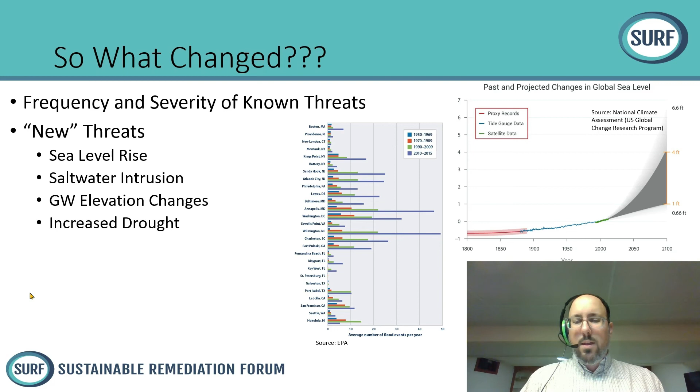So there's some, quote, new threats, and they may not be new, but maybe they're more predominant than they ever have been. So that's kind of causing us to change how we're thinking a little bit to address this. And two obvious examples are Harvey and Sandy. Both of these events had significant impacts on environmental sites.

You can see on the pictures there, the top left corner down in Texas was a site. The first picture is in the heart of the flooding when it was worst, and then on the right, it's about a week later. We still see a fair amount of flooding. So that was an EPA Superfund site that had to go back and reinvestigate and find out what's been released.

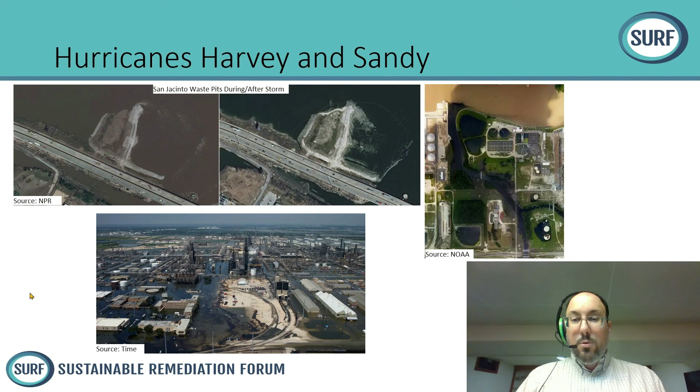The picture on the right and the picture at the bottom are both from some refinery areas down in Texas that had some impacts, where you can see the black, presumed to be oil or some type of petroleum that's gotten into the waterways. So the shift is definitely on. We're looking at a more proactive approach. We're looking at vulnerability assessments now and how we mitigate those risks that we identify.

And this is happening on both new and existing sites. We're not just looking at the new sites as we do design work and working that into our designs. We're also going back and looking at existing sites. How can we retrofit those sites to make them less vulnerable to the risks that we may see over the next period of time?

What it was is a vulnerability assessment or screening of about 6,000 sites in the state of Massachusetts. Through that, we identified about 1,700 of them that have some level of vulnerability, whether moderate or high. It was a risk screening model, which I'll show you in the next slide, and it did use a bunch of data sets from FEMA, GIS, NOAA, etc. There was a report that came out, and that report is also available on that link below, as well as through our website.

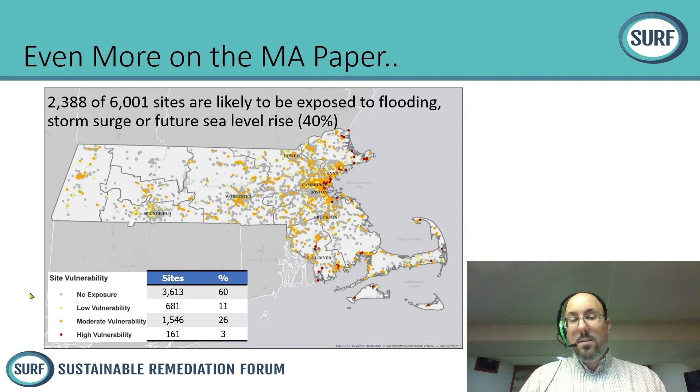And 40% of those sites, as it says on top there, were subject or likely to be exposed to flooding or future sea level rise. So a lot of sites, a lot of things to consider for the state up there. So what else are we doing?

A big contributor to the ITRC SRR team, Sustainable and Resilient Remediation team. We have a lot of folks from SURF that are operating in that. They're putting out a document. It's due out the end of the year. It's going to provide resources to a bunch of folks to kind of help them figure out how they can integrate these type of practices into their projects. It's updating a 2011 guidance that was put out by ITRC.

And the big factor on this, or big extra to this, will be incorporating climate change resiliency, notably wildfires, sea level rise, etc., that were not really in the 2011 guidance. We weren't really up to speed back then. So that's a big part of this and the big driver for the update.

And then there's a lot of recommendations in there to not only look at the environmental footprint and costs and benefits, but as I said, incorporating the social and economic side of things. So it's a balancing act, and that's what this guidance document is really trying to do. So this is kind of a draft idea of what we talked about in the team. I don't know the final product yet, so definitely consider this draft.

But the idea is having something like this with clickable boxes that would take you to links or take you to guidance or take you to BMPs or something along those lines based on the different topic, whether you're looking at what do I do in a certain spot in the life cycle of the project. What do I do if I want to develop a site model? I'm in the RI stage or I'm in the remedial design stage. What should I be considering then?

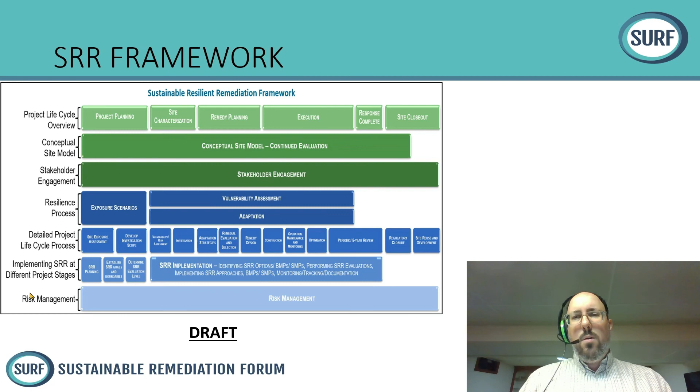I'm looking at risk management, so it's broken down by topics, life cycle, and will hopefully be a roadmap for you to figure out where you can get information based on what you're looking at. And then another idea is something along these lines where it's going to be like a best management practice checklist where you identify your factor you're looking at, and that'll tell you what checklist or what things to consider. So changes in precipitation.

If you're going to see more rain, you're going to expect more flooding and bank erosion and maybe snow or hail, depending on where you're at. So that's where you would want to go and look at those different best management practices, figure out how you can mitigate that through your site. On the opposite, less precipitation is going to bring you drought, etc.

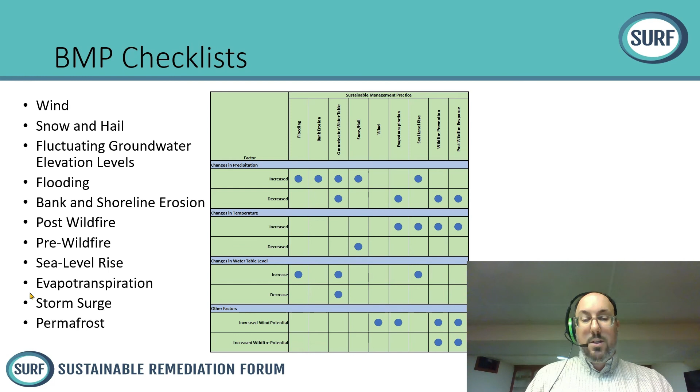So you can see there's a couple things there with temperature, precipitation, change in water levels, which we talked about earlier, the groundwater, and then some other factors too. Are you going to get more wind, which could have impacts on some of your sites, or wildfires? So the idea is make this simple, make it clickable, easy to find, easy to understand, and really help folks to implement these. Not only folks that do it every day, but maybe people that aren't as aware, as a part of an education too.

So future plans, what's needed? I think one of the biggest things we need is to develop a more robust vulnerability assessment guidance. I don't think one really exists from a site remediation standpoint. I know there's a lot of tools on how we mitigate, but how do we score these sites? How do we evaluate these sites? Kind of taking what they did for that Massachusetts study and make it more on a site-by-site basis.

And then take that Massachusetts study and expand it to other states. There's a lot of coastal states that could really use this document, or the screening, if it's not already been done. Take the lessons we learned from that one and apply it to other states to do a similar type of study.

Get the ITRC document finalized, hopefully again by the end of the year, and get that distributed and folks looking at that. Integrating into our planning is a big key, right? It's how do we get this in the project planning no matter where we are, what phase we are.

How can we start to look at this, whether we're in the initial planning or whether we're in the back end where we're design, or even after we've already implemented? As soon as we can get that in, the better, but there's always an avenue to do so.

Getting stakeholders involved is always critical for any project, but even more so for this because of the idea that maybe a lot of people aren't thinking this way. They aren't thinking future necessarily. It's hard for folks to maybe see these things without it happening,

but now as it happens more and more, I think awareness is getting out, and that's the last thing, is really increasing that awareness, making folks outside of our little bubble understand this and start to support it, and it's not just a secondary thing, but it becomes a primary consideration, with the goal of obviously trying to minimize the impacts from all these different events that are happening over time.

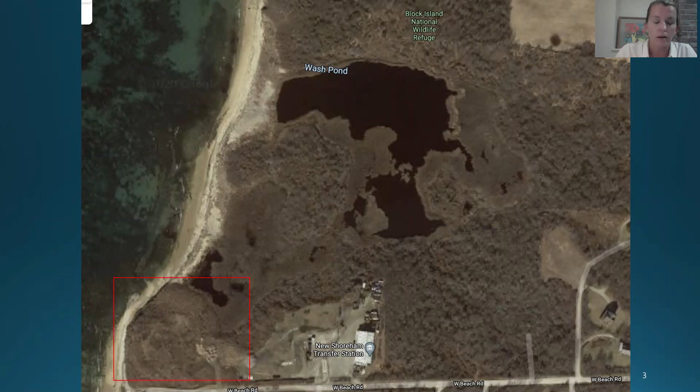So the site location is on Block Island, which is off the south coast of Rhode Island on Block Island Sound. The site itself is on the northwestern shore of the island, adjacent to the Block Island National Wildlife Refuge. Here's a closer view from an aerial photo where you can see in the bottom left, the area in the square is the buried landfill, and the site is still an active transfer station. It's a total of about 10 acres on 3 different parcels. And you can see also in this photo the adjacent freshwater pond and freshwater wetland complex.

The landfill itself was in operation from about the 1900s to January of 1990 as basically an open dump for household waste, demolition debris, etc. It was listed on the DEM CERCLA list as SFA, which meant that it was on the EPA Superfund CERCLA list with a status of active. And I've just included the site number and project date for that reference.

The site is adjacent to several sensitive environments, which are listed here. One already mentioned is the National Wildlife Refuge to the north. There's some federally endangered species habitat, some state listed species habitat. It's adjacent to state designated type 1 waters, which are conservation areas that are designated by CRMC. And the site is also part of the federal coastal barrier resources system. And again, it is right next to that freshwater wetland complex.

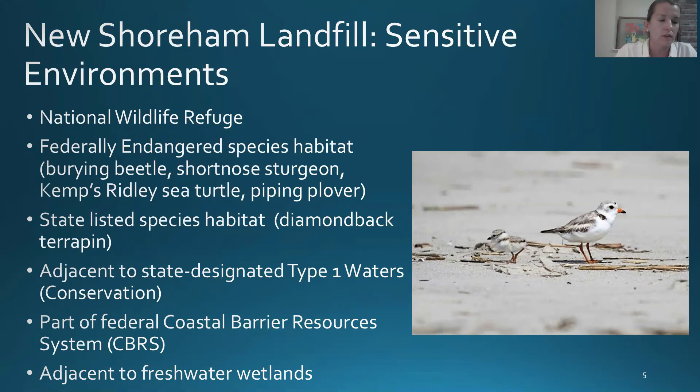Block Island itself has been named one of the Western Hemisphere's last great places by the Nature Conservancy, which manages over 2,000 acres on the island for conservation. So again, the site, the area of landfill in question, and you can see that within the context of the natural areas surrounding it.

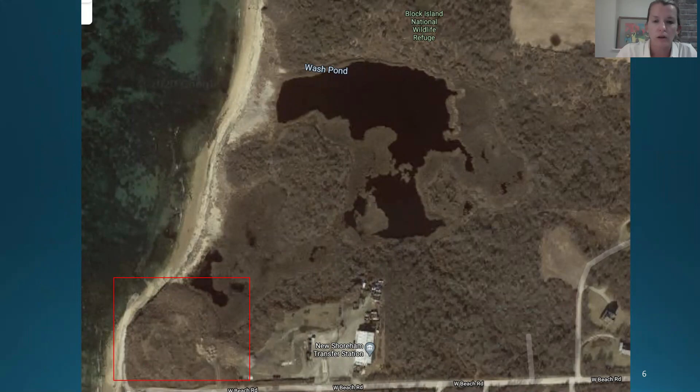So in 2015, there was a CERCLA site assessment that was performed on the site. Just some interesting results from that assessment of note. A few of the soil samples exceeded state residential exposure criteria for metals and PAHs. There were some test well samples that exceeded residential limits for some metals. And then mainly what was observed was the solid waste debris on the western shore of the landfill where the shoreline was eroding. So things like auto parts, ceramic and clay, plastic and metal. It was also noted in the assessment that there is no percolation containment present, which means that contaminants are exposed to ground and surface water pathways.

That assessment was done after 2012 when Superstorm Sandy hit Rhode Island, and the storm definitely exacerbated the erosion that was occurring on the western shore of the landfill, and you can see evidence of that here in this photo that's provided by Janet Freedman, our coastal geologist. So you see some of the erosion that's occurring, some of the solid waste materials that are beginning to spill out on the beachfront. More of that here.

So several different types of materials. So for that reason, the town of New Shoreham applied to CRMC and other agencies to remediate the eroded slope in 2016. They submitted to us an alternatives analysis performed by a consultant that looked at several options.

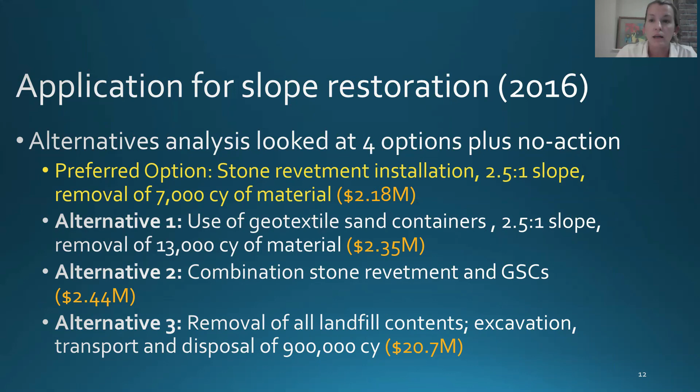The consultant also looked at the no action alternative, which was dismissed because addressing this landfill issue was an action item within the town's hazard mitigation plan. So the town had already recognized the need to act to remediate the situation. So the no action alternative was rejected.

In terms of permitting, the town was required to go to the Department of Environmental Management for a limited action remedial approval letter. They came to CRMC for a coastal assent, which included the need for a special exception, which meant that they needed an exception to a prohibition in our program, which was basically creating a structural shoreline adjacent to type 1 waters. To get a special exception in our program, you need to meet several criteria, one of which is that the project serves a compelling public purpose, which it was determined that this project did.

They also needed to consult with the U.S. Fish and Wildlife Service regarding the Coastal Barrier Resources Act. They needed an exception to that act, which was granted. When those permits were issued, there were several stipulations that went along with them. In terms of the DEM permit, the town was required to submit a remedial action work plan to bring the entire site into compliance, and they were required to submit a draft environmental land usage restriction for the site.

For CRMC, they were required to commit to monitoring of the revetment ends for erosion impacts. They were required to provide for public access by installing a public access pathway. It included requirements for soil stabilization measures during construction. And the town was also required to submit a long-range landfill remediation plan.

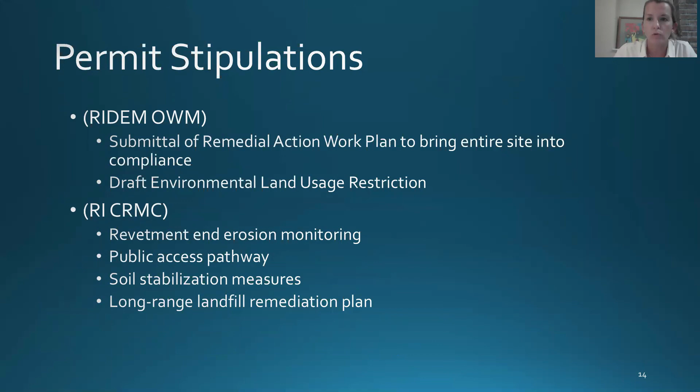And while the preference of both agencies was to see the entire landfill contents removed and relocated and reinterred, that was well beyond, as detailed before, the financial resources of the town. And so a compromise was reached that the town would implement a long-range plan to maintain the slope and remove material from the landfill over time.

What helped in the development of those provisions was the fact that the CRMC has very detailed information about erosion rates along the Rhode Island shoreline, including Block Island. These maps have been created by Dr. Bryan Oakley at Eastern Connecticut State University, and they're very helpful in that they have perpendicular transects which show the average annual erosion rates for areas of the shoreline.

And so these are the transects adjacent to the site in question, which show an average annual erosion rate of about 1.6 feet per year up to 3.2 feet per year. And so our permit staff were able to consider this when making recommendations about what needed to happen over time as far as material removal.

And so basically they determined that over a 15-year period, the site was likely to see erosion of up to 45 feet, so a loss of 45 feet of shoreline. And so the town would need to prepare for that and be willing to remove any material exposed over that time frame.

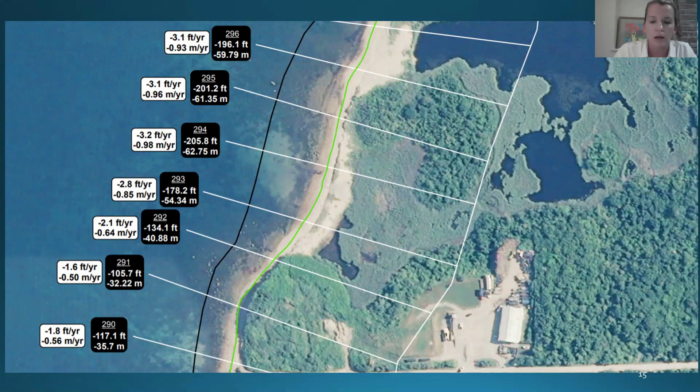Another helpful tool was our storm tools maps, which are high-resolution maps of storm surge and sea level rise modeling that have been done for the entire shoreline of Rhode Island. And so those helped in checking the calculations for the design elevations, looking at what the significant wave heights were likely to be at this site.

Interestingly, the significant wave height detailed by storm tools is a bit higher than what is noted on the FEMA V-zone maps. And so that information was very important, and it was determined that the engineer had adequately accounted for the significant wave height. And really the design was to withstand a 100-year storm.

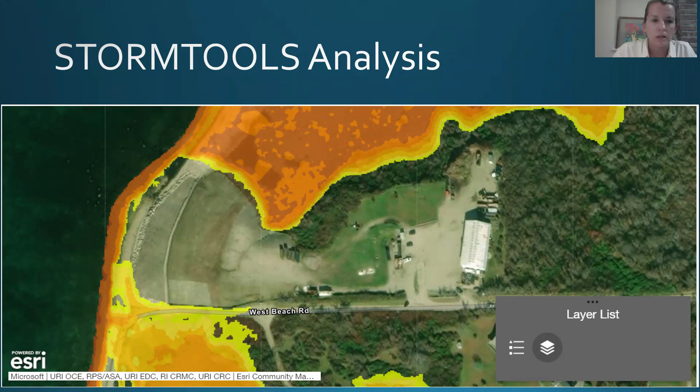When it came time for construction, unfortunately the town lost some federal funding in the form of a community development block grant that they had been counting on, so the project unfortunately needed to be scaled back. Originally, the revetment design was supposed to be 20 feet in elevation. It wound up being reduced to 8 feet with 3 to 10 ton stones.

The resulting slope was originally supposed to be a 2.5 to 1 slope. The design was changed to a 3 to 1 slope, which was to be covered with sand and loam and planted with beach grass. According to the town's engineer, the estimated lifespan of the structure is about 15 to 20 years, which is why that was the time frame for the incremental maintenance plan and removal plan.

The town secured a $2 million municipal bond to fund the project, and in total, about 120 tons of scrap metal and trash were removed to pull the toe of the slope landward approximately 50 feet.

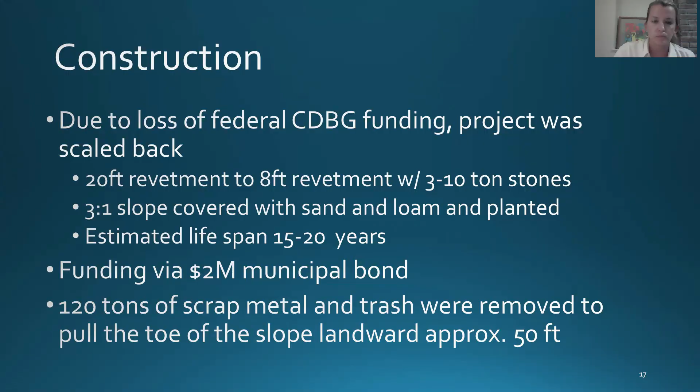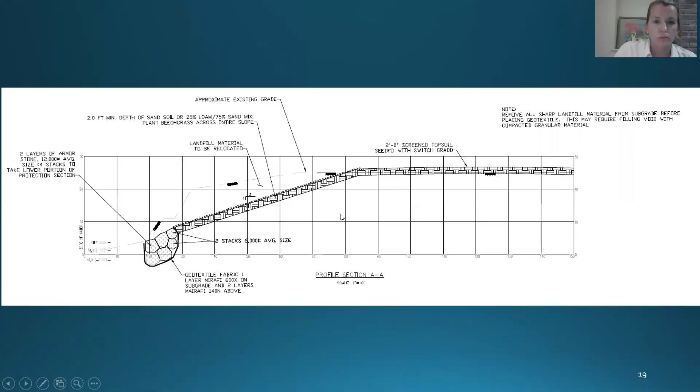Just a couple things I wanted to note at the end of this presentation were that having those detailed erosion rate maps and the high resolution sea level rise and storm surge modeling were very helpful to CRMC permit review. It helped our permit staff to make recommendations that made sense.

Lateral shoreline public access is always an important consideration for CRMC when permitting shoreline structures because of sea level rise impacts. So where it's safe to do so, we want to make sure that there are provisions for preserving public access, which was done here.

Future considerations may certainly need to include impacts to groundwater. As sea levels rise and the water table rises in this area, there may be additional impacts to groundwater quality from sea level rise and saltwater intrusion.

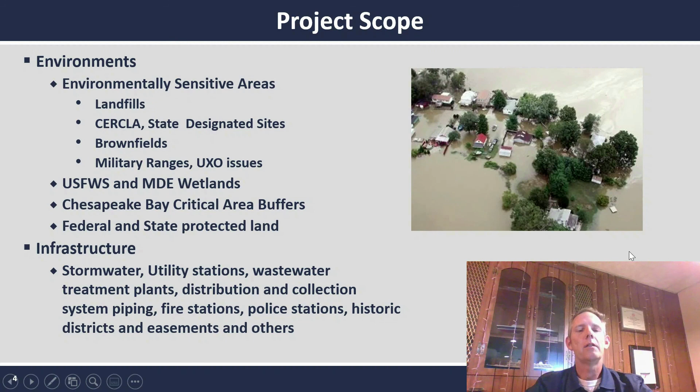And you can see the rest of the encompassing items that the scope addressed, including other environmental areas as well as infrastructure impacts created by the particular project for coastal resilience.

So the next item for the project was to identify climate impacts. And this would be similar to any climate resilience project in that you have to identify the potential impacts. And for us, we were looking mostly at coastal impacts. And you can see the main three components here. So it's not only sea level rise, but potential impacts from precipitation as well as associated storm surge with large events.

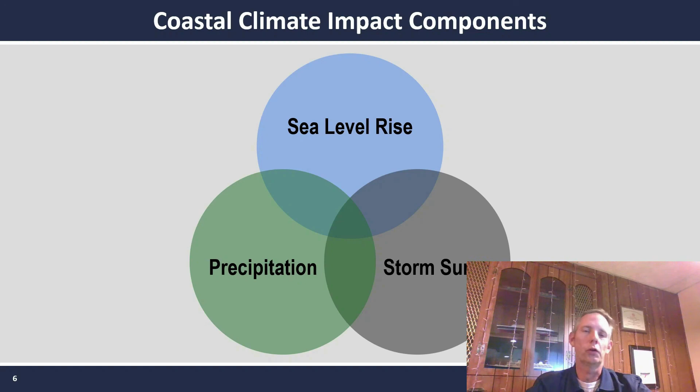So the first item to realize in a project like this is that there are many different data sets. So for our particular site in Northern Maryland, there were several items that we looked at. And basically, you can see here, sea level rise projections from 2018 were directed at a worst case scenario of about 7 feet for the high range. We also had storm surge indicated and precipitation for the area.

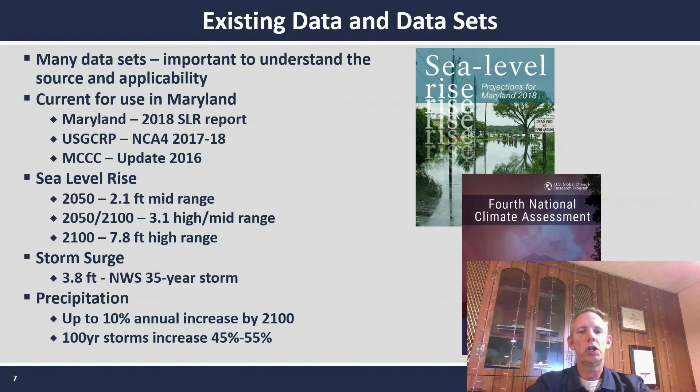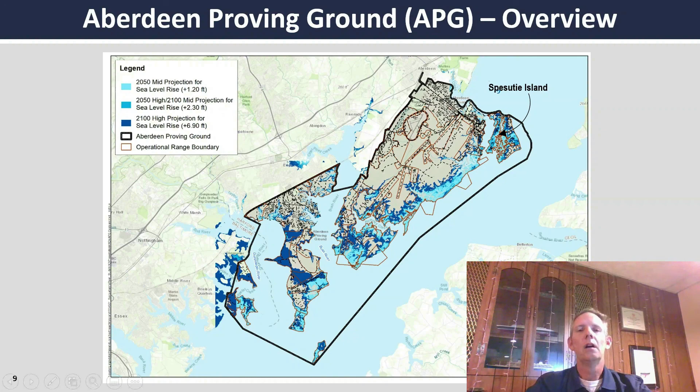So once that is identified, the next step is to identify climate vulnerabilities. And for this project, we looked basically at a GIS-based model tied into those sea level rise components. So you can see here, this is a map of Aberdeen Proving Grounds, which is one of the lowest lying areas in Chesapeake Bay. So we could expect significant impacts to the end of the century.

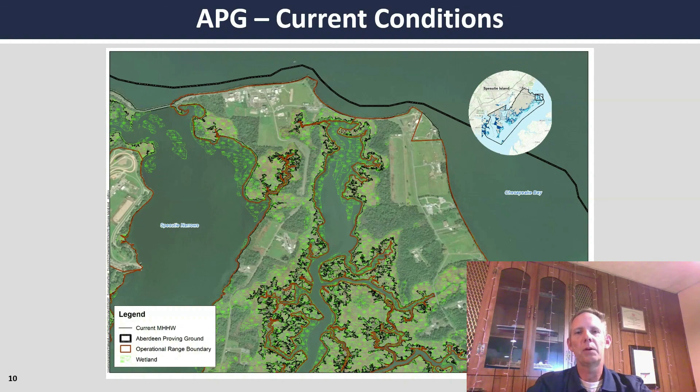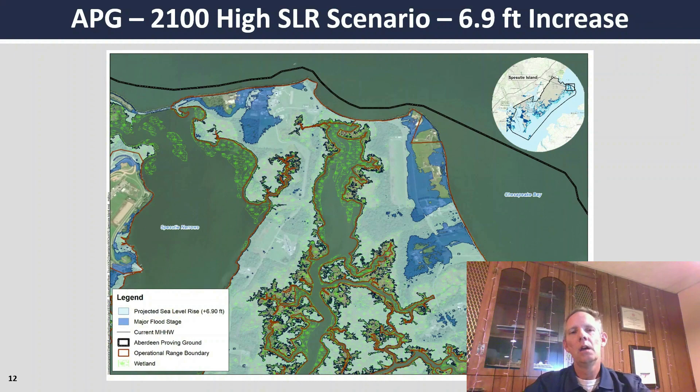You can see here just an example of some of the visualizations of our project, current conditions at Aberdeen Proving Grounds. And then as we move through the century, you can see this is 2100 mid scenario, shows a 2.3 foot increase, but also if you add the major flood stage to that, it inundates further areas. And then worst case scenario, as you get closer to 2100, you can see significant flooding components on this portion of Aberdeen Proving Grounds.

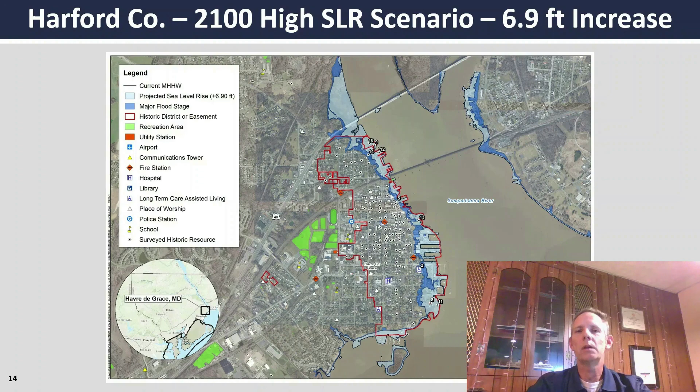So once you've identified the climate vulnerabilities and they're specifically identified, you move to the strategies and measure options that could be brought to bear to protect coastal areas. So when it comes to that, you're talking about a framework of three different ways to proceed. Accommodate would be to alter existing structures to be able to withstand those climate impacts, in this case, sea level rise. Protect would be using heavy or hard engineering solutions to protect areas, including areas with environmental contamination. And third, managed retreat, relocation of structures from those particular zones.

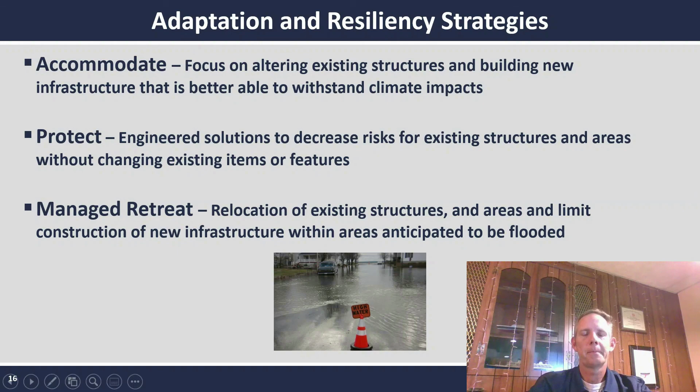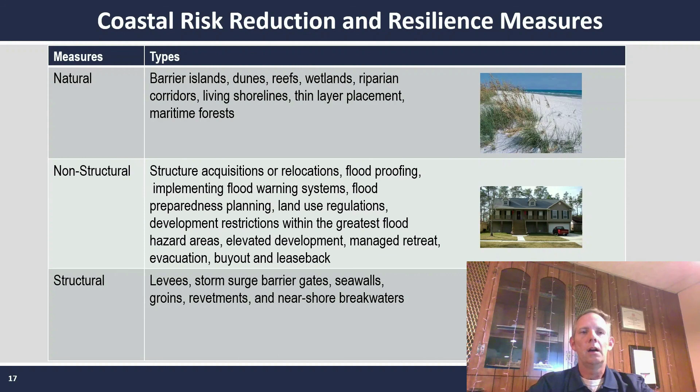Now that becomes problematic if you're talking about managed retreat in the context of contaminated sites, because obviously you would have to remediate those sites or they would still be impacted in those future conditions. So within our report, we identified the potential solutions for these various impacts, and they were defined, as you can see here, in three different ways to provide that resilience: natural, non-structural, and then structural.

Just to touch on what some of these are in more detail, natural or nature-based measures to protect these areas include reestablishing or increasing dunes or beaches in an area. Vegetated features also provide extra protection, such as wave attenuation. So you're talking about increase of coastal marshes, submerged aquatic vegetation.

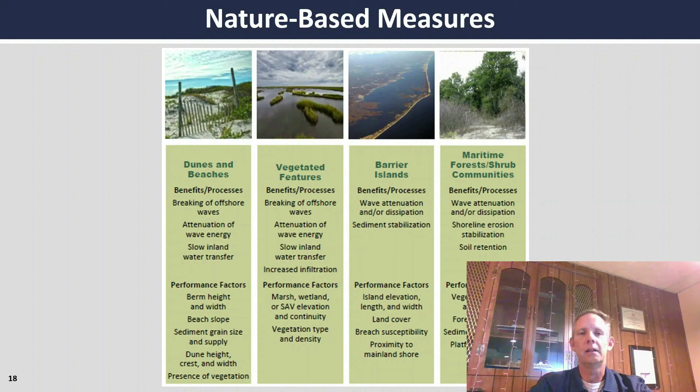We also looked at potential restoration of barrier islands that can also obviously dissipate wave energy. And then another key item, maritime forest and shrub communities also provide some of that extra resilience. So this is one of the first things that we looked at for potential solutions in these areas of impact in northern Chesapeake Bay, the nature-based measures.

Next, there are obviously non-structural measures you can proceed with, such as changing floodplain policy and management. This can have significant benefits later on in the century if you start implementing them now, so that people start moving out of those danger areas.

In the case of contaminated sites, that would also be the case. It gives you more time in planning to remove the constituents of concern from those areas. Floodproofing and impact reduction is also a solution, and obviously relocation is possible in certain situations.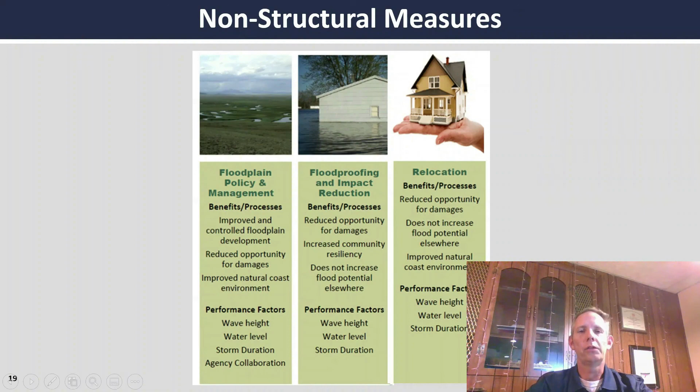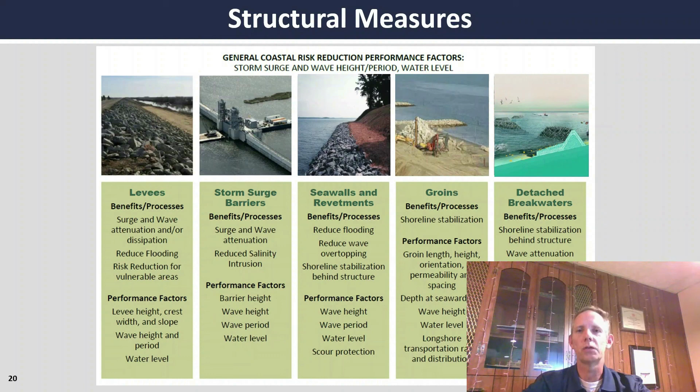Then finally, structural measures. These are items that folks would probably defer to when you think about solutions to coastal flooding. So hard structures like levees, even storm surge barriers, seawalls, and revetments that can provide that shore armoring in situations where a specific area has to be protected. These are sort of a last resort in particular areas.

So once you have possible measures identified, the next is to use those possible measures and adapt them to a specific plan for an area. And some of the keys there, as we talked about before, obviously timing to these coastal impacts is going to be based on how quickly sea level rise occurs. And it's also based on criticality of areas, such as if you have unexploded ordnance in an area, how critical is it to move forward with that quickly.

So again, timelines on when to execute these measures are based on criticality, your specific identified strategies and measures, and then looking at adaptive design considerations, such as seawalls can be designed to be added on later. So make sure that your base design for a seawall that you might construct to 1 foot by 2050 could be raised to 3 feet, say, by 2100. And also, it's key to understand the study horizon. What is your target date for completion?

Another important consideration is that there are many grants available for this type of work. An example was for this project, we had a follow-on project with the city of Aberdeen, which is adjacent to the base, to complete a full assessment of climate adaptation. And we actually looked at using dredged material to provide that coastal resilience and protect that town and some of the environmentally sensitive areas there.

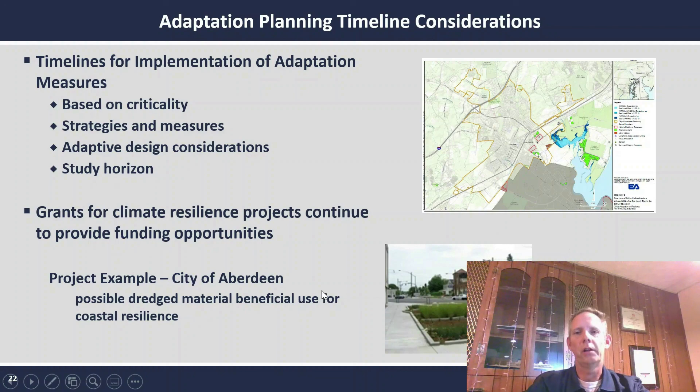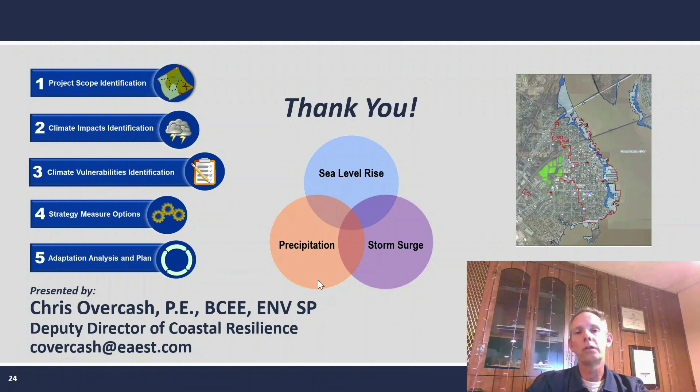This is part of the larger U.S. Fish and Wildlife Service Rhode Island National Wildlife Refuge Complex and supports important wildlife such as New England cottontail, harlequin duck, saltmarsh sparrow, and over 200 other seasonal bird species. Important habitat types it supports are shrubland, cobble beach, and saltmarsh. In summary, this is a popular destination for tourists, it provides unique habitat, and is important for various species. Today we will be talking about the Remediated Landfill, which is located here adjacent to Second Beach.

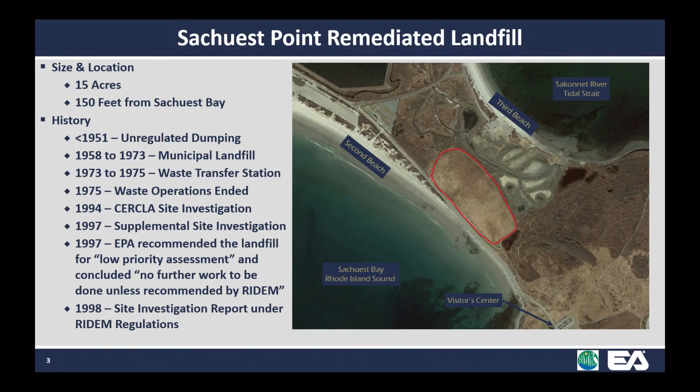Accordingly, a site investigation report was prepared under RIDEM regulations in 1998, and a remedial action work plan followed up in 2003, with the remedial action being completed in 2005.

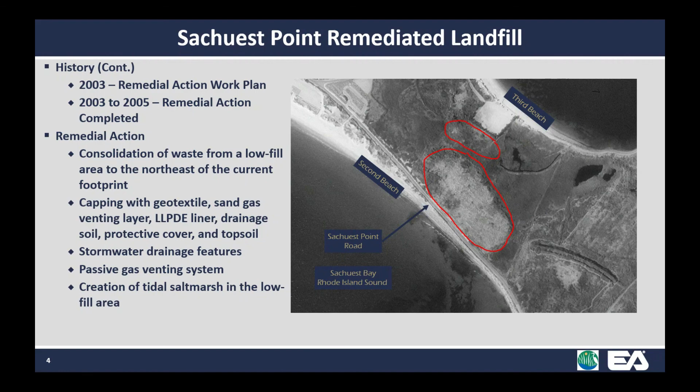Stormwater and gas venting systems were installed, and the low fill area was restored as a tidal salt marsh, as you can see in this aerial.

To briefly discuss the contaminants of concern within the landfill, there's widespread distribution of several chemical compounds, including PAHs, pesticides, PCBs, hydrocarbons, and metals. These are at relatively low concentrations, but there are exceedances of regulatory and guidance levels in several media. This is very typical of constituents found in landfills that operated in this time period.

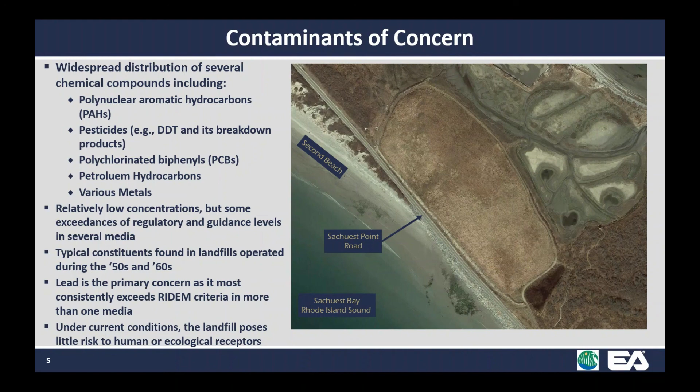Lead is the primary concern as it consistently exceeds RIDEM criteria in more than one media. Under current conditions, the landfill generally poses little risk to human or ecological receptors because it is closed, or so we thought. In 2012, Superstorm Sandy made landfall on October 29th and was rated between the 10 and 25-year recurrence interval event by the time it made landfall in Rhode Island.

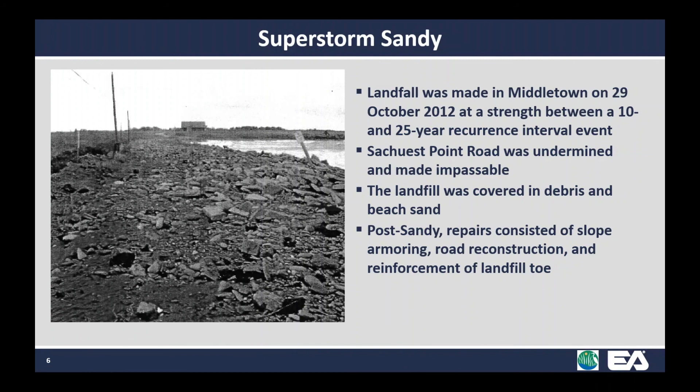Post-Sandy, repairs were made, which consisted of slope armoring, road reconstruction, and reinforcement of the landfill toe. I have this photo here, which is present-day Sachuest Point Road, looking in the opposite direction, but you can see the slope armoring to the left. There's also toe armoring at the toe of the landfill to the right, which you can't really make out, but it's there.

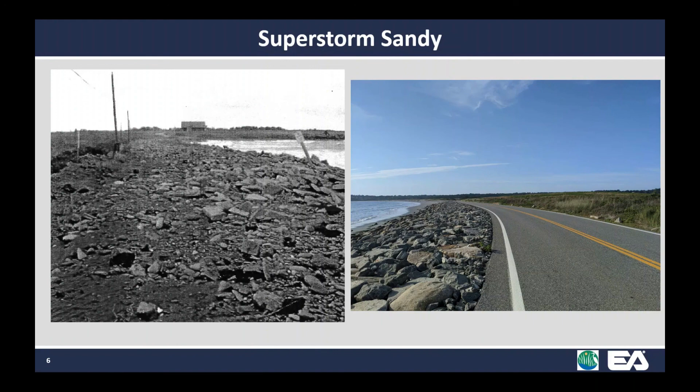So, as a result of Superstorm Sandy and the encouragement of the town of Middletown and the U.S. Fish and Wildlife Service, EA was selected to evaluate the landfill cap as to its vulnerability now and into the future to damage associated with storm surge and catastrophic weather events.

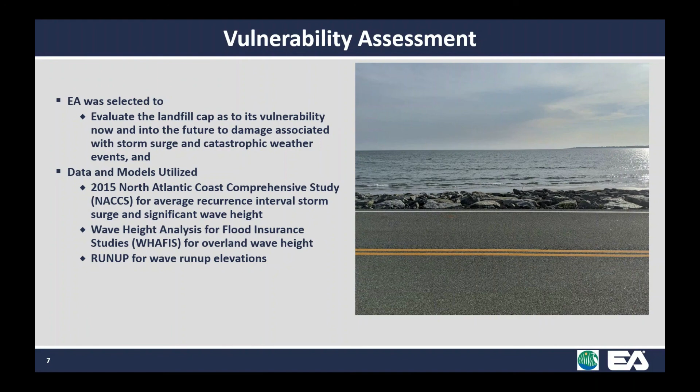Data and models we've utilized included the 2015 North Atlantic Coast Comprehensive Study, the Wave Height Analysis for Flood Insurance Studies, WHAFIS, and RUNUP. So some of the data that we relied on included the USGS topobathymetric elevation model, for which data was recorded after Superstorm Sandy.

We also, as I said, used the comprehensive study results for the 100-year average recurrence interval storm event, which provided the still water elevation and significant wave heights for whatever storm event we wanted. For this evaluation, we used the 100-year event.

And finally, for sea level rise, consistent with state guidance, we used NOAA's 2017 high sea level rise curve and evaluated 4 different time periods: present, 25 years from now, 50 years, and 75 years.

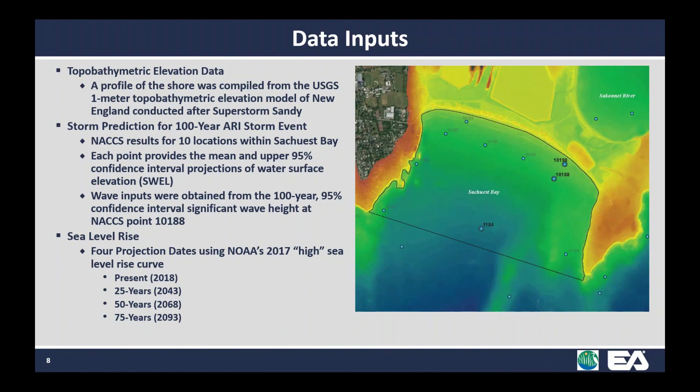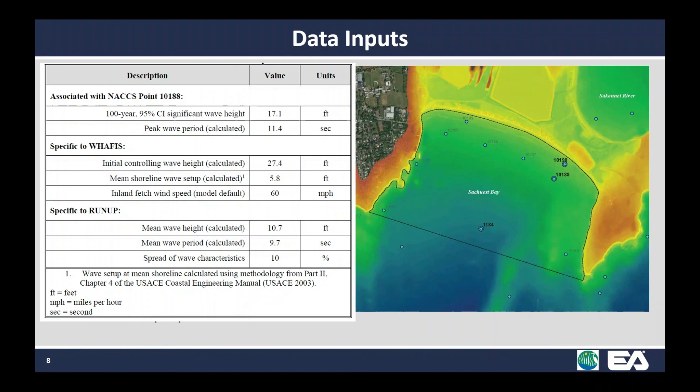So I just wanted to note some of the methods and limitations of this study. Basically, the 100-year storm characteristics predicted by the comprehensive study were applied as is to each sea level rise projection. In other words, if we had a significant wave height from the comprehensive study, that significant wave height was the same no matter which sea level rise projection we were evaluating. However, in actuality, as a result of climate change, those characteristics may change along with sea level.

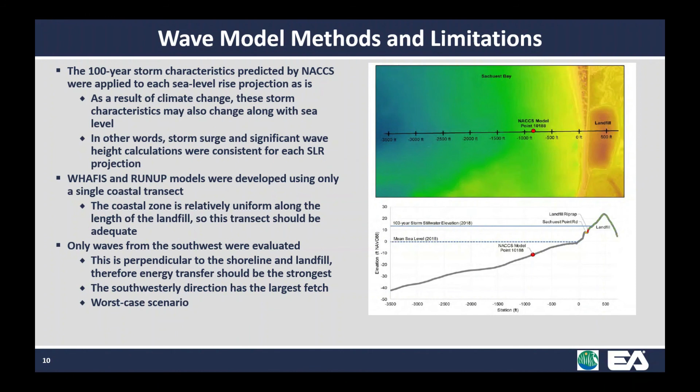So, results. This first chart shows the 2018 results, so present sea level rise. At the bottom of the chart, we have mean sea level at 0.6 feet. We have Sachuest Point Road, the yellow, the landfill riprap at the toe of the landfill, and then the rest of the landfill up to the peak. The 2018 still water elevation is at 13.4 feet. So even without waves during a 100-year storm event, the road and the landfill armoring are submerged.

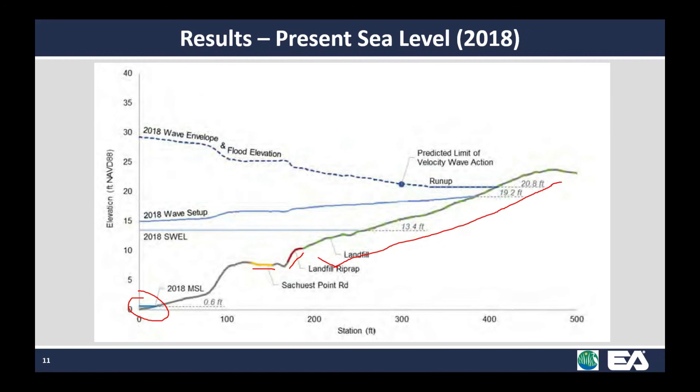When you start including wave setup and wave envelope, we are experiencing energy transfer onto the grass cover of the landfill, directly onto the cover, the unprotected cover. And this is without sea level rise. I'm not going to show the 25 and 50-year results because they are just steps in between the 75-year results, which I'm showing here.

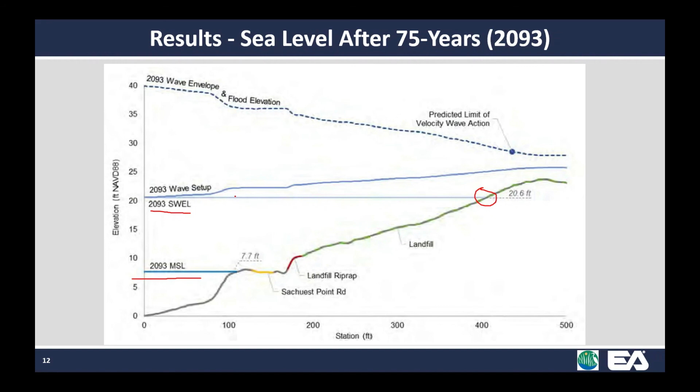So we also evaluated existing cap vulnerability. As we saw during Superstorm Sandy, anecdotal evidence indicates that storms below a 25-year event can impact the toe of the landfill slope, as we saw by the debris being distributed across the landfill. EA evaluated the vulnerability using Army Corps of Engineers methods, and we found an overtopping discharge right at the top of the armoring of 175 cubic feet per second per linear foot.

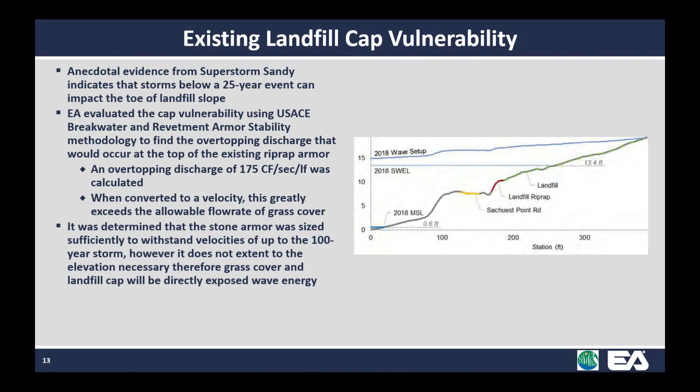When converted to a velocity, this greatly exceeds the allowable flow rate of grass cover and indicates that significant erosion would occur. It was, however, determined that the stone armoring was sized sufficiently to handle velocities, just not placed to the elevations required.

So, conclusions. The Sachuest Point Remediated Landfill is susceptible to coastal storms. Under present-day sea level, the landfill cap will be impacted by a 100-year average recurrence interval storm event, potentially eroding soil, damaging the liner, and releasing contaminated material into the environment. These impacts will only be exacerbated as sea level rise continues.

In fact, with present-day sea level, the cap is already vulnerable to storms less than the 100-year ARI. As sea level progresses, the ARI that threatens the unprotected portion of the cap will decrease, meaning as sea level rise progresses, smaller and smaller storms will pose greater and greater threats to the landfill cap.

So, solutions and path forward. We are working with the U.S. Fish and Wildlife Service now to perform an engineering evaluation and cost analysis on several alternatives. A quick summary of our remedial action objectives include taking preemptive action to protect human health and natural resources, preventing mobilization of landfill debris and contaminated soils, preventing mobilization of contaminants into groundwater, minimizing the resources needed for repetitive maintenance, and maintaining and improving ecological habitats at and near the landfill.

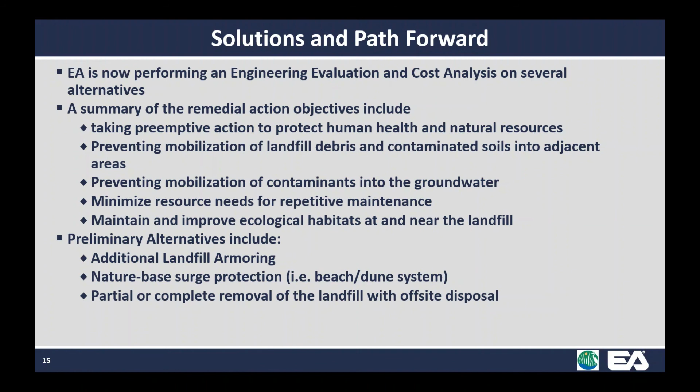Our preliminary alternatives include additional landfill armoring, nature-based surge protection such as a beach dune system, and partial or complete removal of the landfill with off-site disposal. So, in final word, this project has demonstrated that this remediated and closed landfill is susceptible to large storm events and sea level rise. It is very important to note that this is just one example. There are many active and closed hazardous and contaminated sites across the country in the same situation, and something that we need to evaluate.

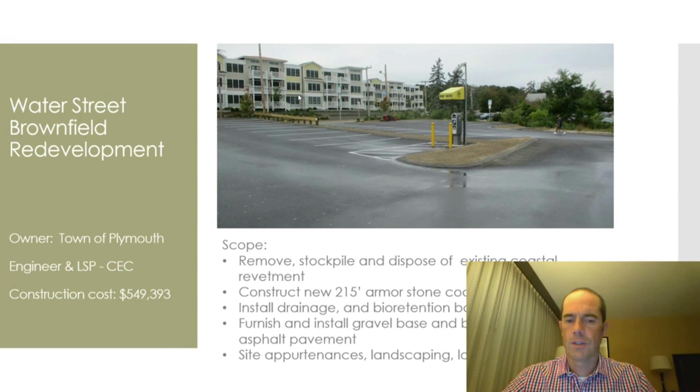So the first project we're going to look at is the Water Street Brownfield Redevelopment project in Plymouth, Massachusetts. This is leading up to Plymouth's 400-year anniversary. A lot of work going on in town to get things shored up. This site was contaminated with petroleum hydrocarbons and PAHs, jumbled down revetment system, Phragmites on the bank.

Clearly there was some armoring at one point, and I know this is going to make most folks at this conference cringe when we look at another armoring solution. The issue here was a pretty abrupt elevation change. Typical permit conditions driving design where we didn't want to extend into the resource area, into the high tide line, which you can see there. A very recent one, certainly not necessarily mean high, but most recent high, and trying to retain that armoring and stabilization structure within a narrow footprint from parking level down to the high tide line.

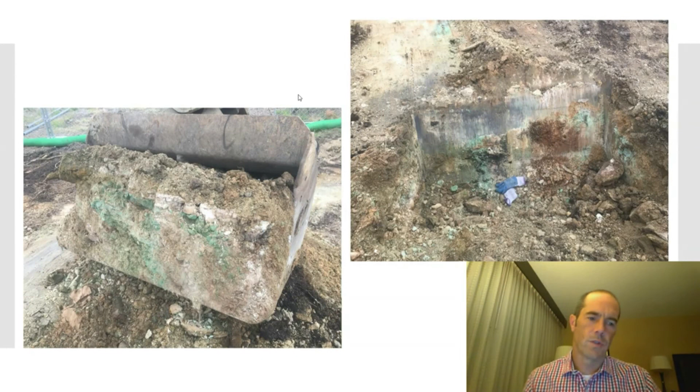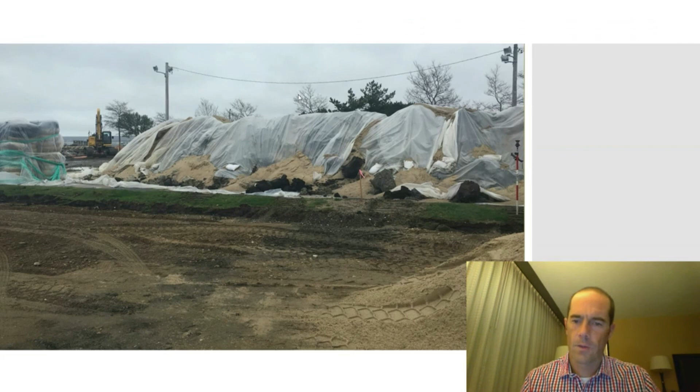Also, it was a contaminated site, so significantly less engineering tolerance for failure there, because we're trying to retain those contaminated sediments or contaminated material in the upland. So scope of this, typical contaminated site, DEP file numbers, EPA Brownfield grants, everything else. Green soils are not necessarily native soils, so it needed to get out those hot spots. So there was certainly a degree of contaminated material that needed to be excavated, removed from the site, and backfilled. Nothing atypical about that dig and haul type remediation system.

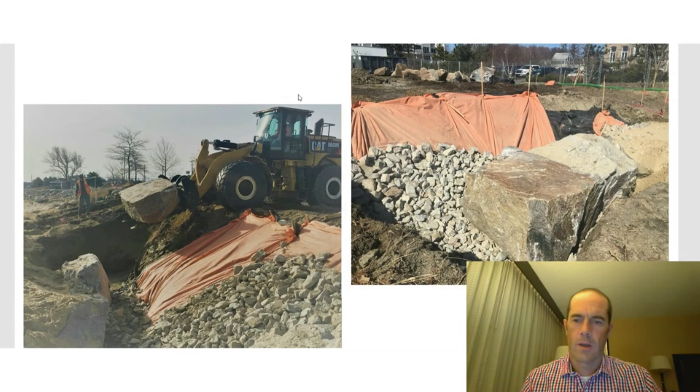But then as we start working into the coastal environment, obviously some very large rock that went in, again, cringeworthy. I know, I apologize for the audience here, but that's what was designed and engineered for this particular location. So excavated down, had the orange marker layer to identify where the limits of contamination were, should that get exposed in the future, an indication that something needed to be done to reconsider that coastal bank. So working that revetment along that 200 linear feet of shoreline, plus or minus.

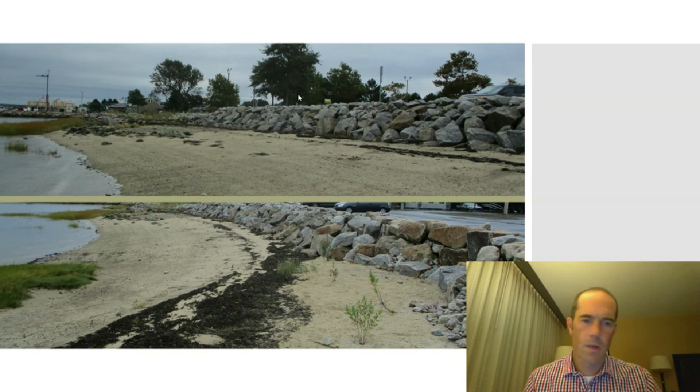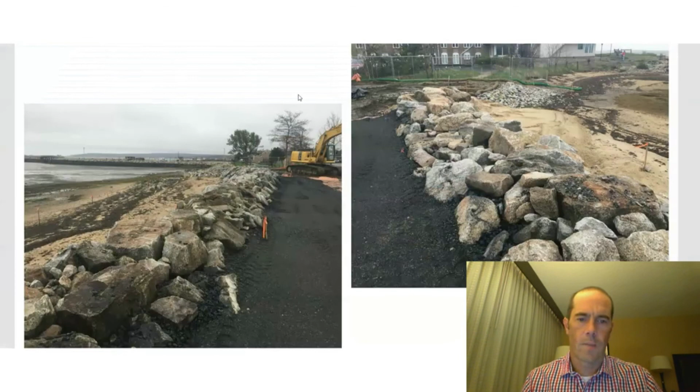And in this case, we're not looking for a smooth jetty type structure. They were looking for more of a natural, well, I shouldn't say natural, but more irregular surface. You can see that the top elevation there is fairly consistent across the site, the design elevation for that structure. So then working back from that revetment structure, we have the orange marker layer, again, extending into the site over the top of the lower level contaminated soils that were remaining in place, up by the excavator, the marker layer there, and then a bedding material of reclaimed asphalt.

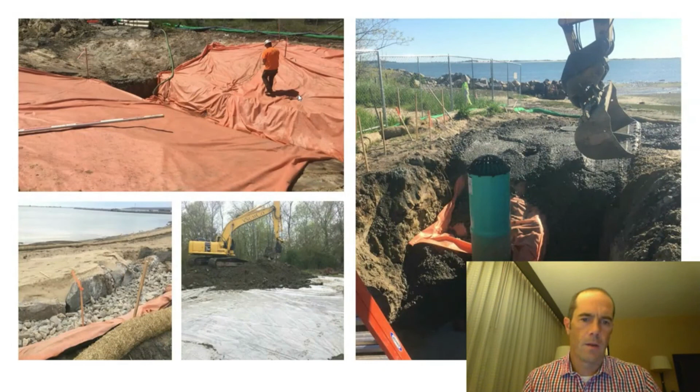And then within the site, from a stormwater standpoint, this is a parking lot, so they actually used a bioretention facility. So we've got the orange marker layer, again, over the contaminated soils that were remaining in place, lower level. That's the under drain trench that runs along the bottom of the bioretention area. We got a focal point in drop inlet within that retention system as that bioretention basin fills up to drop into there. And then a finished condition.

So, again, this is not necessarily our long-term forever situation here. You can see that the revetment that was there before was tossed around a bit over time. Parking areas, repaving. This is not necessarily a nature-based solution, but it is downtown Plymouth, and it's a resource to the town, something that will need to be maintained over time. Some uplift to the site in that the higher level contamination was removed. There's a resource for the town with the parking, better management of the stormwater system. So that was the outcome of this project.

Slightly different variant on that is the Senator Joseph Finnegan Port Norfolk Park Remediation Restoration Project in Dorchester, Massachusetts. This is on the Neponset River estuary, so this is actually up into the estuary on the Neponset River, whereas the Plymouth project was located right on Plymouth Harbor, so a bit more exposure to particularly northeast storm events that we hear a lot about up in our area.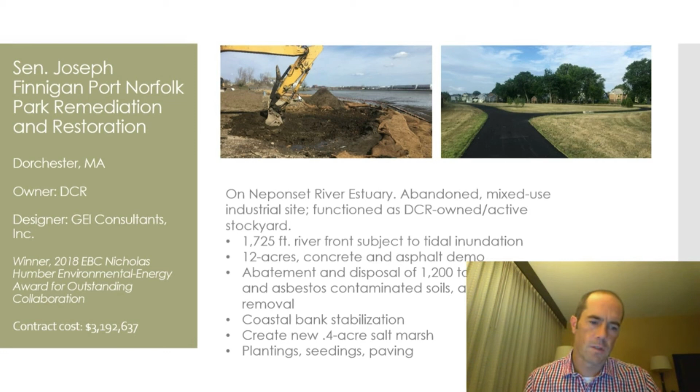And rather than going with a hard solution here, we were able to employ some nature-based solutions on the coastal environment, as well as, rather than full hardtop impervious surface again, we're able to cap the residual lower level lead contaminated soils with 2 feet of horticultural soils as the cap, and install a passive park over at the top of it. So, I mentioned being able to use some bio-based solutions, nature-based solutions.

We actually had a pretty expansive area of high marsh growing on top of the asphalt that had been left there following the removal of the industrial facilities. So we salvaged that salt marsh sod, found a couple appropriate elevations along the perimeter of the site where we could place that as part of the restoration effort.

A couple other areas where we had a steeper profile, we put in some fabric encapsulated soil lifts. You can see the coir log down at the bottom of the picture there. Those timbers were removed down to grade, but we didn't go subgrade, so that allowed for those to provide some additional stability of the toe for that system. And then that entire length was planted with appropriate elevation marsh species and coastal bank species as part of that bio-based solution, nature-based solution for the perimeter of the site.

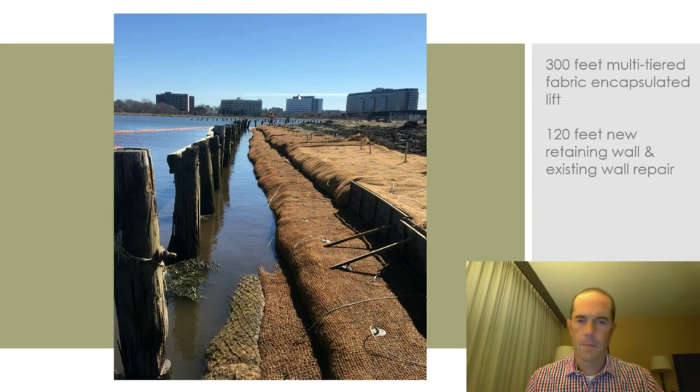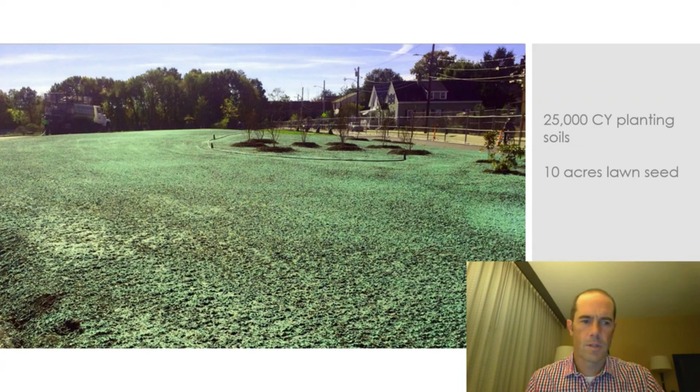Then working up into the site, we seeded the balance of the area, put in some pocket plantings. These are native seed mixes, some more turf-based grass seeds, as well as meadow and forb mixes that were designed for the site. Pretty tight specifications for the soil mixes that went in there as well.

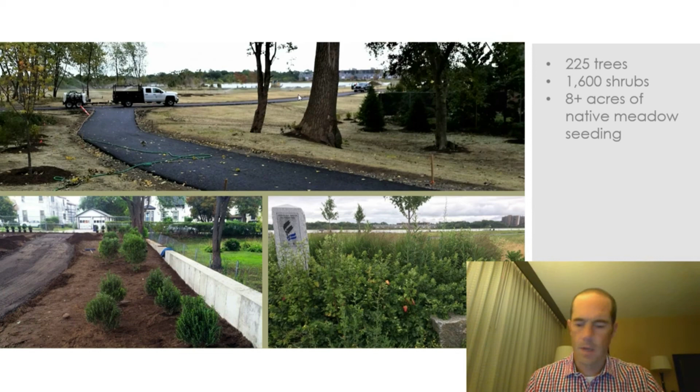And this picture is set more for context of what I'm going to talk about a little bit related to the water. So this is during a spring follow-up inspection. The tide rack line was actually running through the middle of those three birches that you see in the middle of the scene. So while this was very much an upland remediation restoration site, passive park, this was the year following. We had 3 or 4 really solid nor'easters up in the Boston area. Made the news. The Seaport District was flooding, and so while this is an upland remediation, even here in 2020, we're seeing some pretty significant events that are pushing water across sites like this.

So if we then kick this forward, and what I was talking about at the beginning, taking a look at the water control during construction phase, really there wasn't any, right? Because other than the fringing components of this site where we're working intertidal, all of this was upland restoration, upland remediation, site development, site restoration. So kick this ahead 20, 30, 50 years, and this is very possibly an intertidal zone. We may be talking about high marsh species versus turf species. So we do have this window for a lot of the sites like this, depending on how forecasts play out relative to sea level rise, where it's going to be a lot easier to do these projects now than it will be 50 years from now.

And we also, as we think about the lifespan and longevity of some of these projects, are thinking about what these might look like. And so this site certainly allows for some migration of those species; we've got a big open passive soil surface site. This could very well become salt marsh over time. Whereas the project over in Plymouth, we've got an impervious surface revetment stone that, from a resilience and long-term longevity standpoint, is very different than this one.